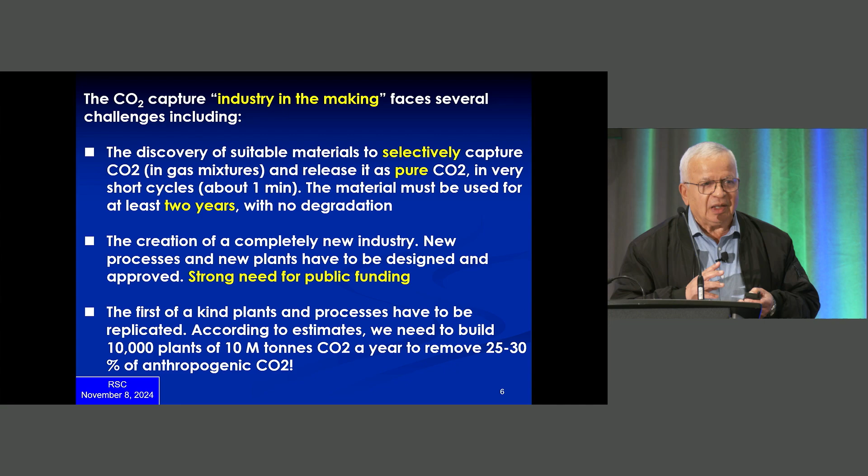Okay, so the first problem we said is the CO2 emissions, how large is it? Then the industry does not exist, okay? It is now being built, that industry. We don't have industry for CO2 capture. We have industry for CO2 removal, and that's a different thing, and I will explain.

Okay, this is the CO2 removal. This industry exists 70 or 80 years now, and it removes CO2 from high-value gases, like natural gas or hydrogen. And therefore, we afford to have a cost on this technology. But if you are removing CO2, or if you are capturing CO2 for the sake of capturing CO2, it has basically no value. Okay, so we are removing CO2 to make clean nitrogen, and we just let it go in the atmosphere. So that's why it is very costly to just capture CO2.

But if you are removing CO2 from natural gas, it's fine. It can have a cost, and we add it to the cost of natural gas. Or if you are doing it to purify hydrogen, that's fine. If it has a cost, we put it on the cost of hydrogen. But if you are removing CO2 from flue gas that we usually just let go, then we have to try to decrease the cost as much as possible.

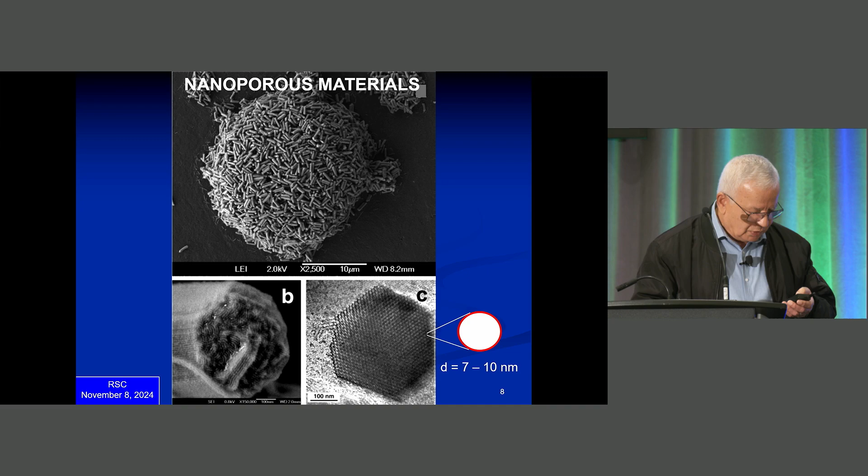And even that cost, it has to be paid by society, because there is no value to the CO2 we make. Well, there is some CO2 that has value, but most of the CO2 that we are trying to capture, we try to sequester. Okay, that is the issue. Now, what is the problem with this technology? It has been used for CO2 removal, and we can use it for CO2 capture.

So what do we do? We remove CO2 from a mixture of gas, then we sequester it in this compound. Then after that, we take this compound and we release pure CO2. Then we can do whatever we want with that pure CO2. It's no longer mixed with natural gas. And up to a few years ago, we just let it go, because the objective was to remove it from natural gas, not to capture it. But now we want to capture it and we want to sequester it.

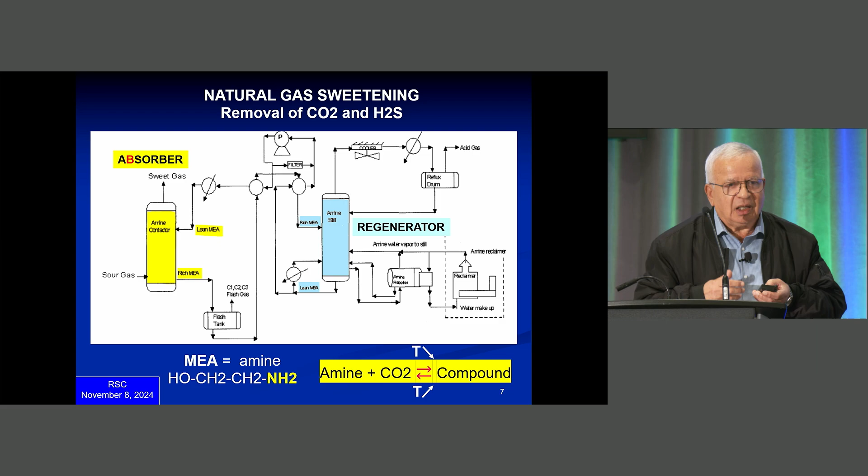And that's where my expertise comes to play, because I have a lot of knowledge in nanoporous materials. These nanoporous materials are materials that have very, very tiny channels. As you can see, their diameter is about 10 nanometers. And for those who want me to remind them, you take 1 millimeter, everybody is familiar with 1 millimeter, and you cut it in 1 million pieces, and that's a nanometer.

So these pores are very tiny, and they create a huge surface. And I need that surface to anchor my amine. So now I move from a liquid that has amine dissolved into it to a solid that is holding the amine groups. And I don't need to deal with any water at all. So I move from absorption, that is the removal of CO2 from a solution, to adsorption, that is the removal of CO2 using a solid material. So I'll be talking about adsorption using this kind of material.

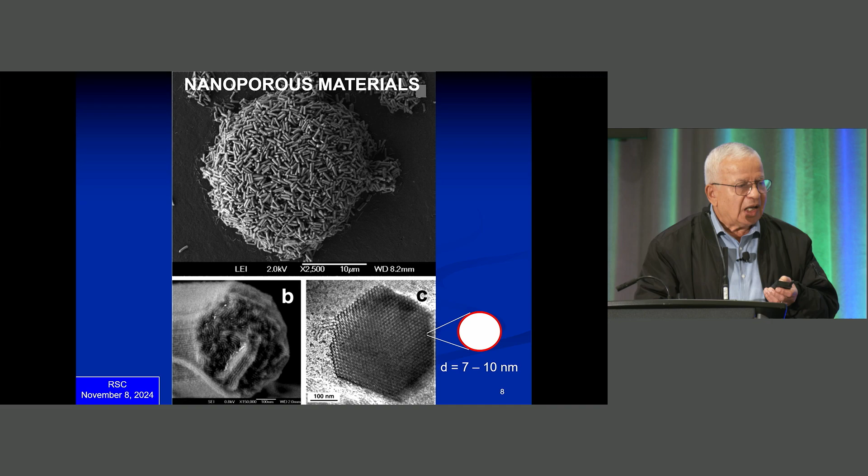So how we connect amines to this kind of material. There are 2 types of amines. The first group, you can see, I don't think I have a pointer here, do I? But anyway, at the end of these molecules, you see this silicon something. So these molecules have their left part that can be anchored to a surface.

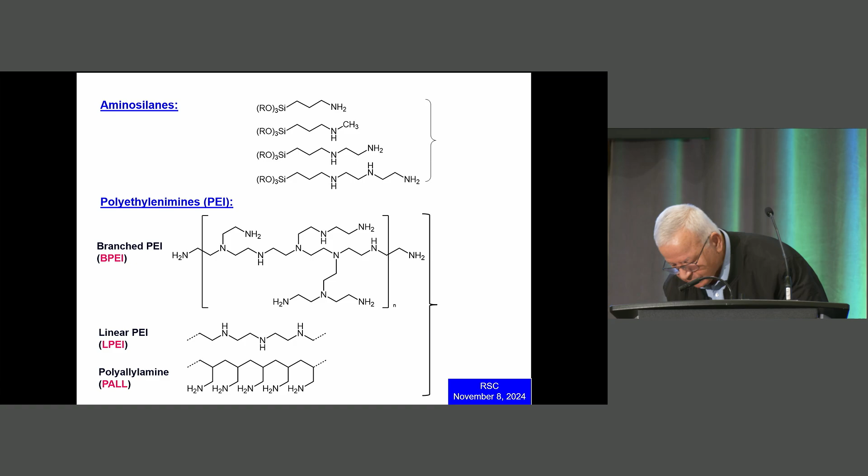The other are polymers. You can see, yeah? I think this, no, that's to go back. No, sorry. That's fine, I can keep.

So the other group that I call polyethyleneimine, PEI, these are polymers that are rich in amine groups. You see, every time you see nitrogen, it's an amine group.

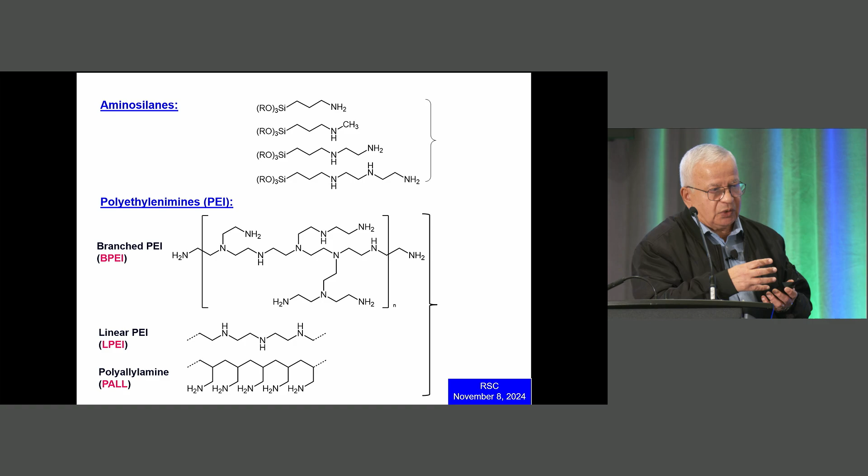And the way to associate these types of molecules with the solid that I showed you, there are two ways. The first group, they are directly connected to the surface of silica. You see, the surface is rich with these OH groups, and they are directly connected. So we call this the surface grafting method.

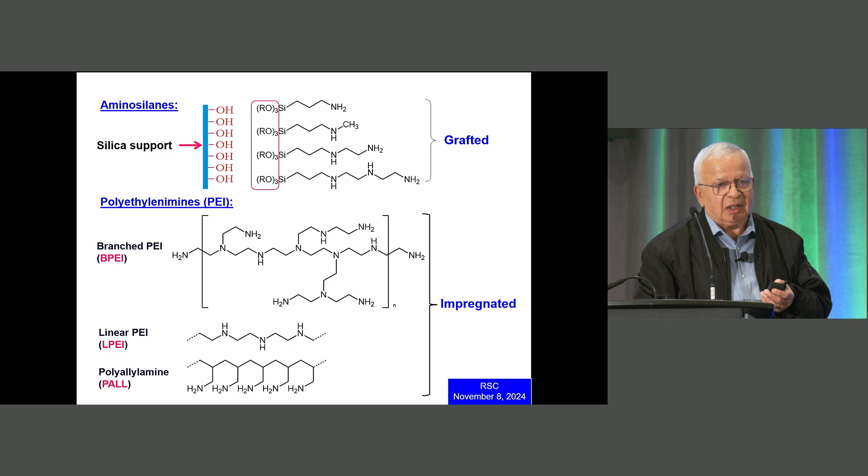The other group, we just deposit them in these channels. Because these are polymers, we drive them inside those channels using a solvent. Then after that, we dry the solvent, and they stay there. So now, this is our material to capture CO2. We have a solid material that has amine groups, but the chemistry is very similar from solid to liquid, or from liquid to solid.

And for the first 10 years, this is what we did. We discovered some material. For anybody it's just a white powder, but it has the capacity to capture CO2 from mixtures and release pure CO2. Because people say, why are you capturing and releasing? We are capturing from a mixture, but we are releasing pure CO2.

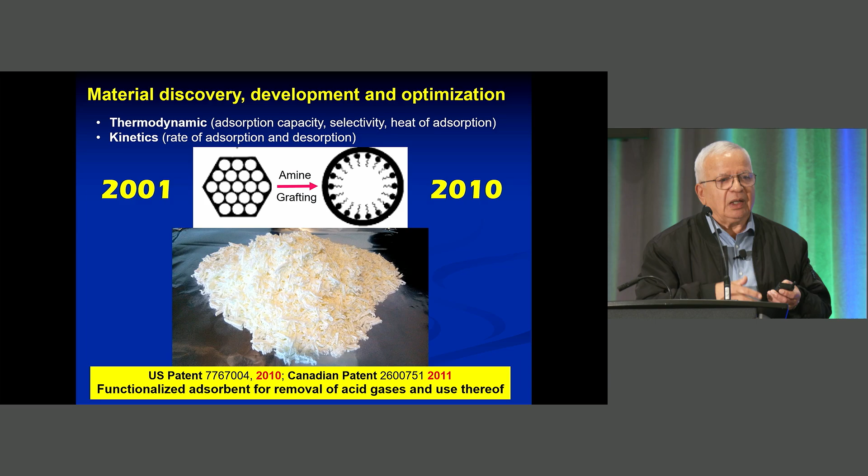And then pure CO2, you can pipe it to somewhere and do many different things with it. I can show you later on what we can do with it, but we have too much of it. So most of it has to be sequestered, even though some of it can be used to make chemicals or to do enhanced oil recovery or things like that.

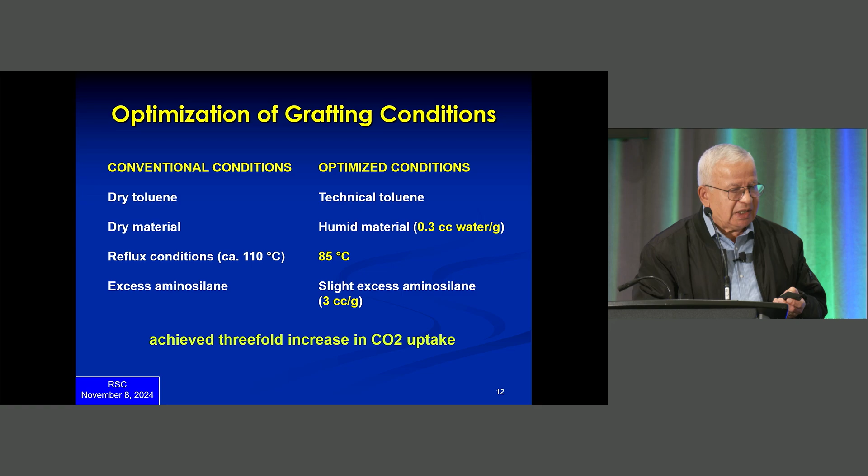Okay, so the first thing we did a long time ago, we optimized the grafting conditions. I'm not going to go through the technical detail, but by doing that, we were able to increase the CO2 uptake by a factor of 3. The next thing is, when you remove CO2, you are using some available gas mixture that has CO2 and you want to remove it.

All of these gases, they contain water. So even if you remove CO2 from air, it has water. From flue gas, it has water. From biogas, it has water. So we need to look at what is the effect of water. That is the first thing we need to do, because water is there everywhere. All these gases have some relative humidity, so we needed to look. And that's why our first paper was about water tolerance. That is our first paper 20 years ago.

Because there are some other very, very good adsorbents, but they are very sensitive to water. So in order to use them, we need to dry the gas, but that is out of any possibility. It's too expensive to dry air to remove CO2. Okay, so we need to use the gases as is. If they have water, so be it. Then you need to develop materials that are tolerant to water.

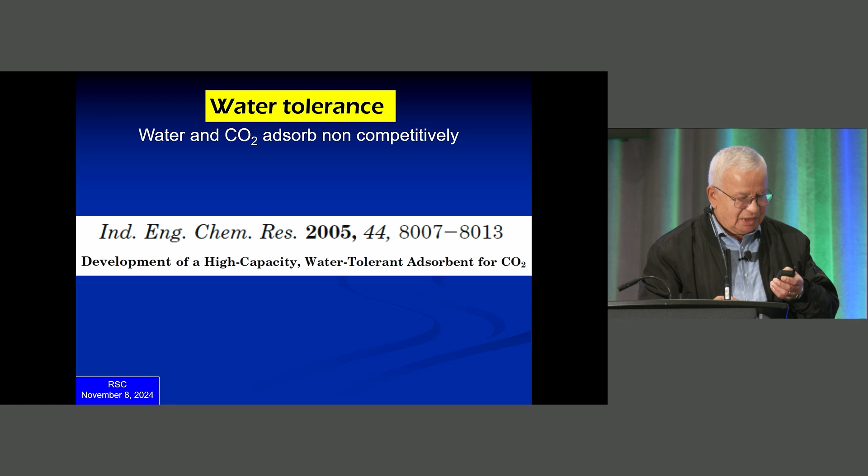Then we discovered that these materials are not only tolerant to water, they benefit from the presence of water in two ways. The first one, we found that water is actually a promoter of CO2 adsorption. You can see the line that goes up, that is our material. When you increase the relative humidity, your CO2 uptake increases. At least in this particular case, it increases by 25%.

While when you take some other famous adsorbent like zeolite 13X, you can see it goes south as soon as you have water in your gas. The chemistry for the promotion is shown there, but I promised not to talk a lot about chemistry. But there is a chemical explanation why water promotes CO2 adsorption, because it changes the chemistry to something more favorable.

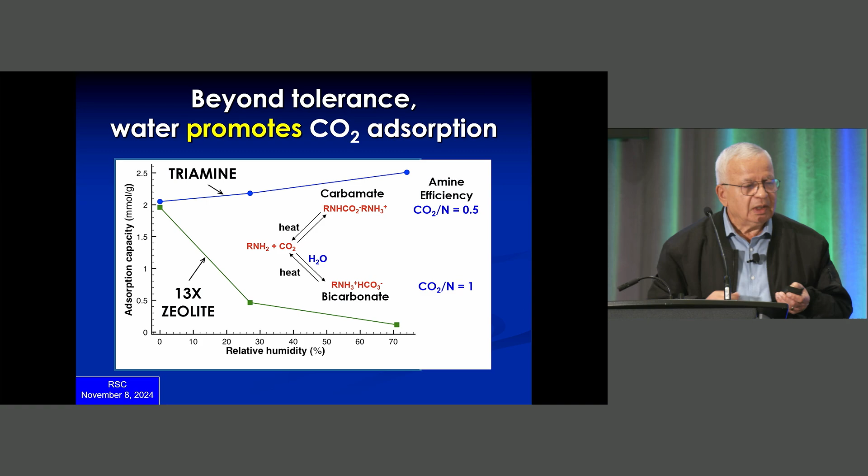The other thing that we discovered later by sheer luck is that we wanted to look at how stable our material is. In order to see how stable our material is, you need to cycle it, okay, to adsorb, desorb, and see what happens. And that's what we did, okay? So here, these are 5 experiments with 5 different materials under 5 different conditions. But don't look at the detail.

What you need to look at is how they are all decreasing. So my material is losing steam, is deactivating. Even under very mild conditions, it is deactivating. And here I am using just a mixture of CO2 and nitrogen from a gas cylinder. So it's not even a real mixture, it's a very simple mixture.

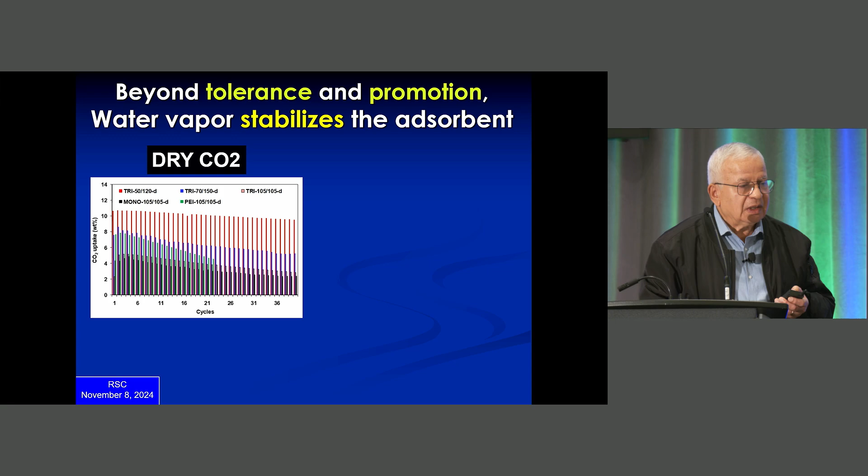And by luck, we humidified, we added water in the gas phase. And this is what happened. So everything got stable. So water has a stabilizing effect on amine groups, and that also has a chemistry origin. Under dry conditions, the CO2 itself is poisoning the amine by making some stable groups and removing the amines slowly in the form of groups that we call urea.

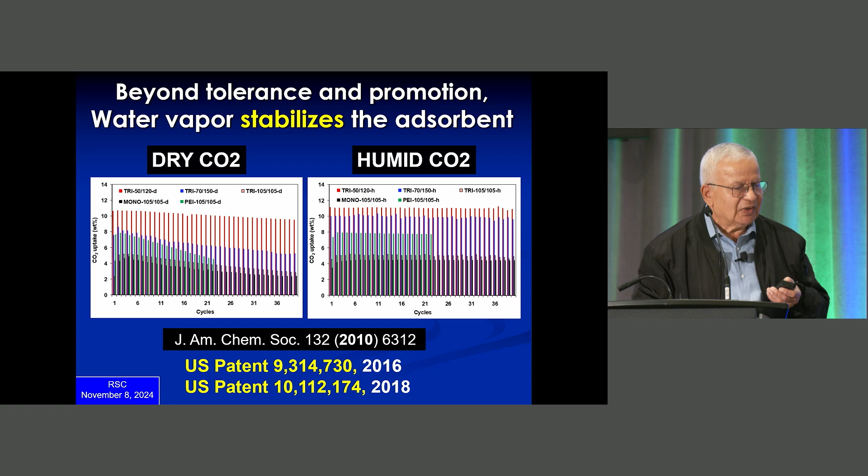Instead of this reversible chemistry, now we have an irreversible chemistry. And the origin of that irreversible chemistry is the absence of water. In water, it does not happen. That's why the materials get stabilized. And we patented that discovery, and we published it in a nice journal.

And the next one, this is chemistry, unfortunately, but it shows you the red arrow leads to the irreversible chemistry. And you see that irreversible chemistry releases water. Then if you put water, it will prevent it. So if you have water in the gas stream, you have the lower chemistry, what is written in the bottom of the page, and there everything is reversible. So everything is stable. So that is a very, very important role of water.

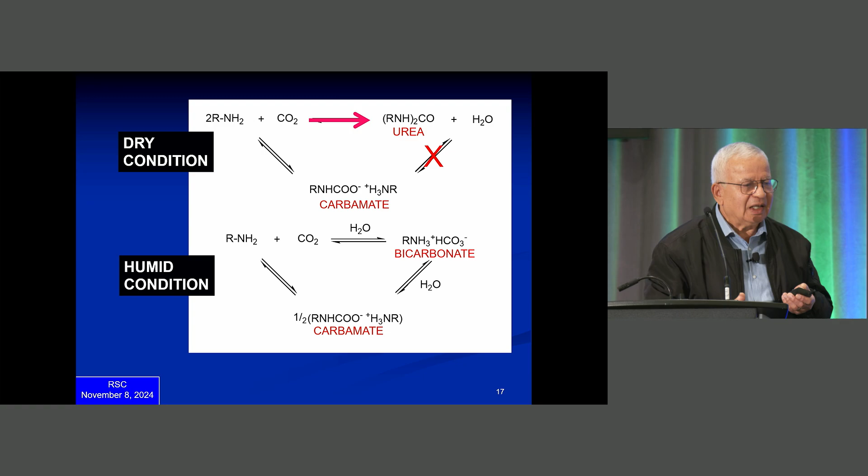Now, basically, even if you have dry gas, you need to humidify it. So water is no longer an enemy. It's on the contrary. We need water in the gas phase, first to promote the adsorption, and second, to stabilize the amine. Okay, I'll move on. This is too much chemistry, so I'm moving on.

Okay, so this basically summarizes all the things that we've done the first 10 years, and it was mostly focused on the development of materials. Then we said this material is not in the lab, where it has to stay for a couple of days or 3 days. In industry, some industries want this material to stay there for 2 years. For 2 years, you are cycling, and every cycle takes 1 minute. They want 1 million cycles to get their money back. So we need very, very, very stable materials.

But this process, especially the industrial process, is brutal. I will show you later what the material has to go through every single minute. So the material has to have all kinds of resistance, from chemical to against oxidation to mechanical to thermal, to a lot of stability issues, so that the material has to be there and has to perform at least up to 80% of its maximum within a period of 2 years.

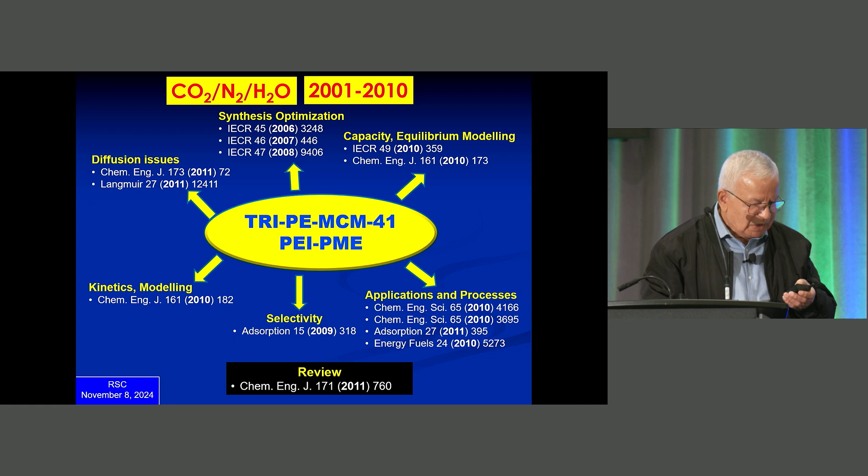So we try to look at the effect of other impurities that we usually find in flue gas. Most of the work is done with flue gas in mind. Flue gas is the combustion gas in power plants. You are combusting some fuel, and that fuel has nitrogen and sulfur and particles, so there are many, many different impurities. You could have H2S, like in biogas. You could have SO2, like in flue gas. You could have also nitrogen oxide. And we need to look at the effect of each one of these impurities.

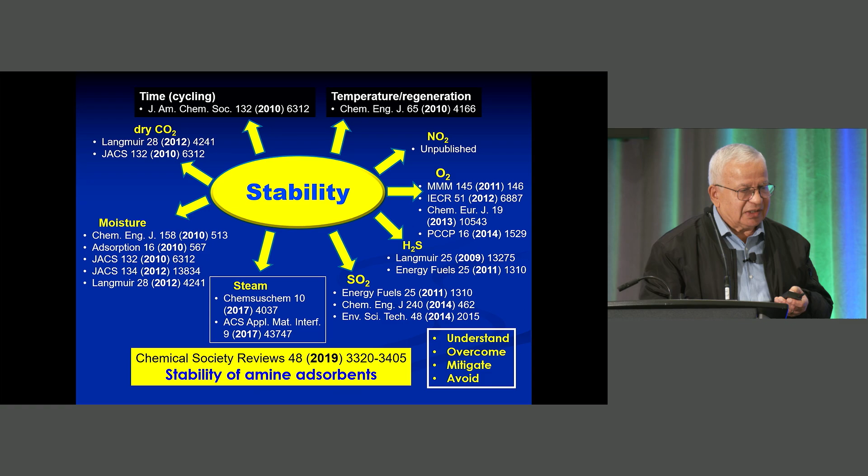So I'm going to talk a little bit about SO2, because I think a lot of you are familiar with acid rain. That is SO2. A long time ago, this flue gas was released as soon as you made your combustion. You just release it, and it has a lot of SO2, which combines with water in the atmosphere and makes sulfuric acid, and it drops as rain on forests and things like that. Since then, there has been legislation to remove SO2 from flue gas, but there are limits of SO2 concentration that you can release.

But even at the ppm level, that's parts per million, SO2 can be very harmful to amine groups, because first it is an acid gas, the same as CO2, so it absorbs as CO2, but it absorbs more strongly. Then it will poison your amine.

So even if you have very, very low level of SO2, you need to get rid of it before you remove CO2 or before you capture CO2. So basically, we need to create a new material that we use as filter, that we use first to remove the SO2, then the rest of the gas will go to the material that is meant to capture CO2.

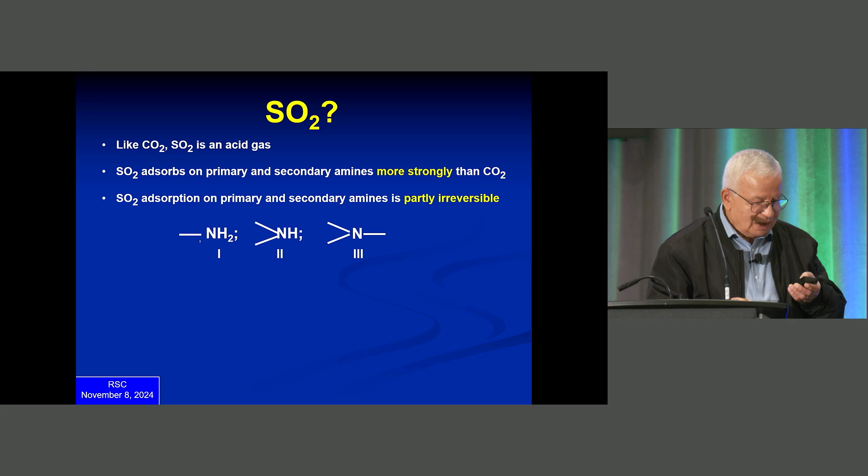So you see the one on the left has 2 hydrogens, that's a primary amine, then the secondary amine. Those two, they absorb CO2. But the other one, the tertiary amine, it does not absorb CO2, but it absorbs SO2. So we said, okay, we're going to make a material that has only tertiary amine. And that's by just changing existing material.

So for example, here you have different examples of material that has originally primary amine. Like, for example, this dendrimer that you see on the left-hand side, inside it has tertiary amine. You can see every amine does not have any hydrogen, but it has a corona with NH2s. These are primary amines. And people who know organic chemistry, they can remove all these hydrogens and replace them by methyl groups. And now what you have on the right-hand side is a material with only tertiary amines.

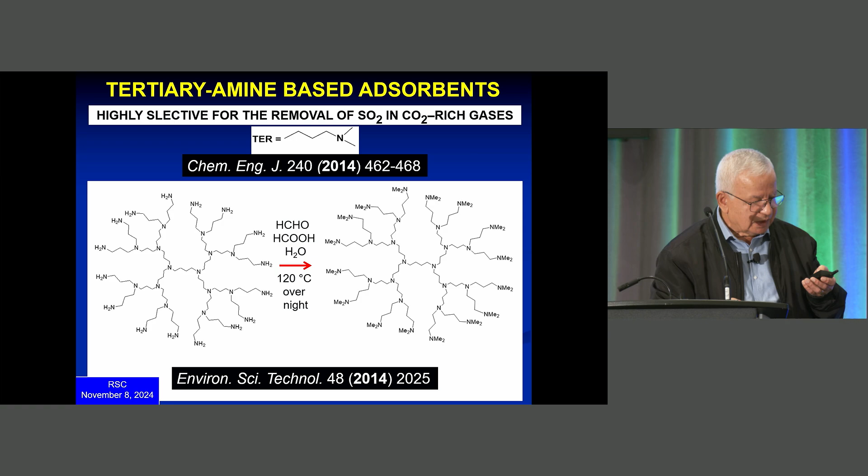Okay, this is another example. This is yet another example that we did very, very recently. But all these are based on the same idea, how to make a material that has only tertiary amines. Because those tertiary amines, they selectively absorb SO2, but they don't absorb CO2.

So when you have your mixture that has, let's say, 15% CO2 and 10 ppm of SO2, you have to run it through this filter, and it will remove that tiny bit of SO2, and the rest of it will be SO2 free, and will go to the material that I talked about a while ago that captures CO2. Okay, but when we capture CO2, we need to use gases that are free of SO2, completely free, okay? Even if you have few ppm, after a while, they would have an effect.

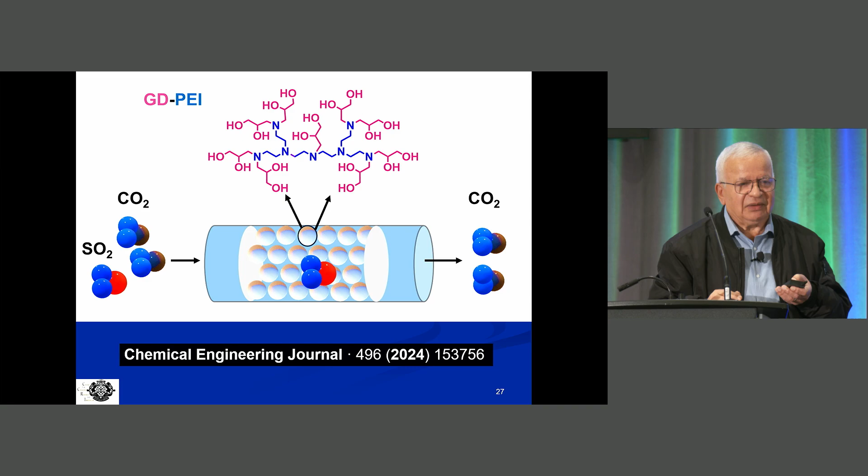So you can see here that we get the same, this 2.49 or 2.52, this is the SO2 capture, either as 5 ppm SO2 in nitrogen. There is no CO2 there. But after that, we add 50% CO2. So when you compare 5 ppm and 50%, there is the ratio of 10,000. There is 10,000 more CO2 than SO2, but yet we capture the same amount of SO2.

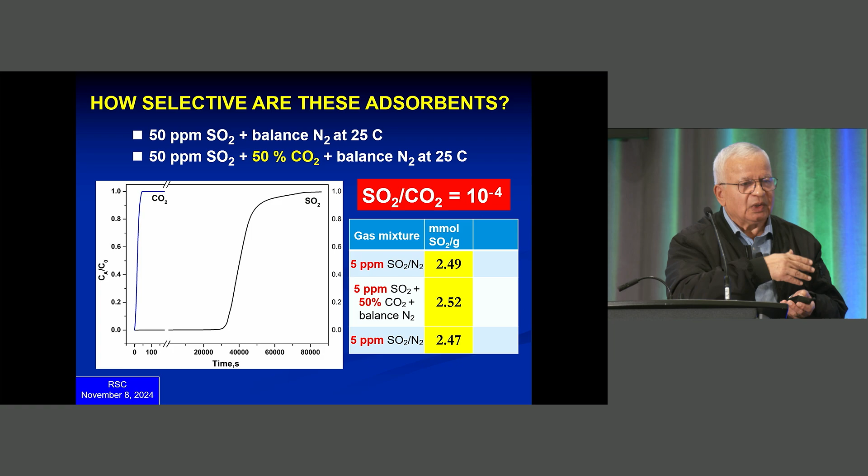So this material is extremely selective, and it will free your gas from SO2 completely. Then you can move to the next step. And you can use it as a filter in the same tower, so it will not be a separate process.

This work is on the oxidative degradation, okay? We are all very sensitive to oxidation because that's how we get older, because of oxidation. So oxidation is the effect of oxygen. And as you will see later on in the process, there is one step where the material is in contact with air at high temperature. And that's where oxidation may occur. So we started working on oxidation.

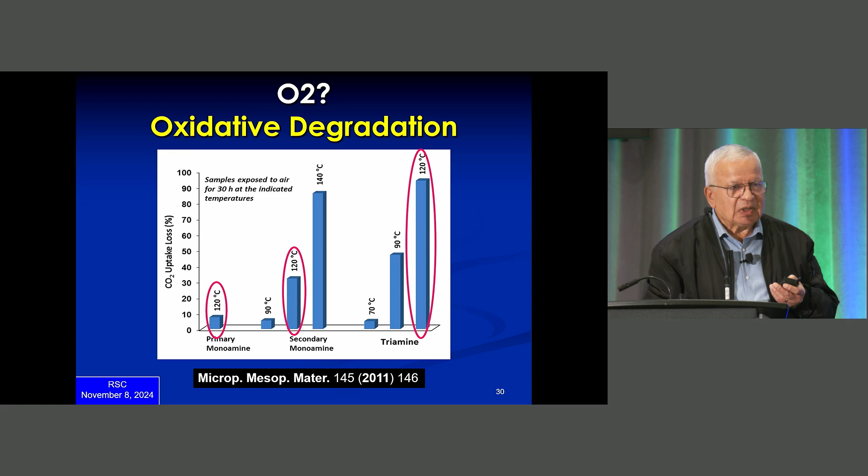So this is different types of oxidation, different data on oxidation, and there are different temperatures for different materials. And this is now probably the #1 issue that many academic labs and industries are working on, because it's very difficult to overcome, okay?

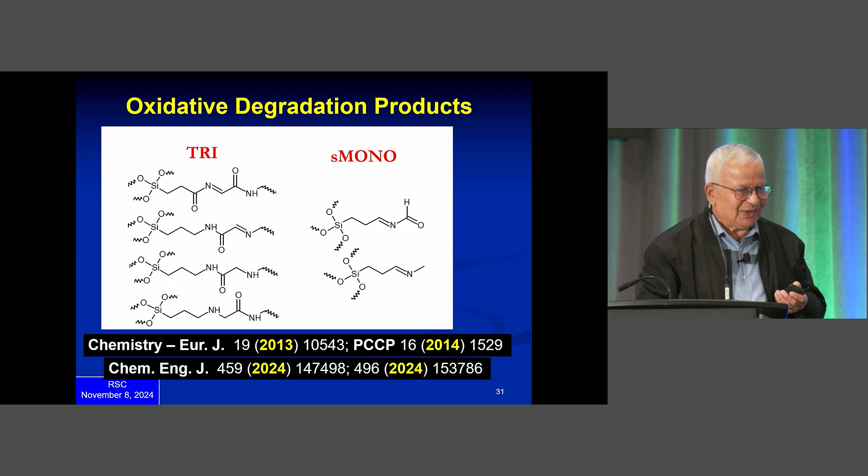And now I move from my lab to outside my lab to tell you a few things that I know, but I am not part of. Well, I'm part of it in discussion and in collaboration, but I am not in the bulk of it. Okay, so these are 3 among the most successful carbon capture companies, and they are all still in their infancy, because they all started less than 15 years ago. Before, there was no industry for CO2 capture.

So for example, Svante, which is in our neighborhood here, started in 2007. Global Thermostat started in Georgia, 2009, and Climeworks started in Zurich.

And all of these companies, they have roots in universities. They actually use materials that were developed in universities by people like me who do not know anything about industry. Okay, so for example, Global Thermostat, they are using materials that have been developed at Georgia Tech. Climeworks was started by two students from Zurich, but now each one of these companies is worth more than $1

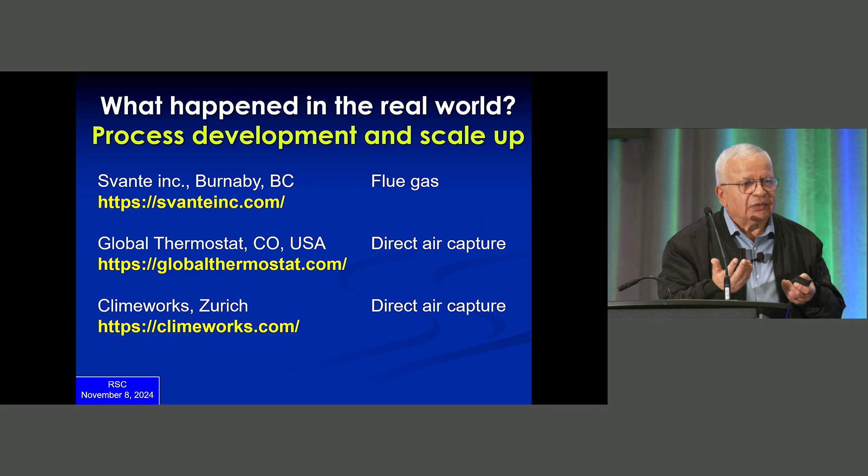billion. Okay, and there is a lot of public funding in this area right now, because the only way we can develop this industry is by public funding. The real industry still does not see the value or the opportunity for investment, for return on their investment.

Okay, so this is the typical industrial process. It's in 3 steps. Step 1, you adsorb the CO2 at a relatively low temperature, usually from room temperature to 60 degrees. Then you regenerate the material at higher temperature, usually around 100, 110 degrees. Then you have to cool the material to bring it back to the original state, to reuse it. And this cycle has to be very fast, because we need to remove lots of CO2. So the material has to respond very quickly to all these events.

Now, for regeneration at high temperature, you can just heat, but in the industry, many industries opt to use steam, because steam is often available in power plants. And the other advantage of steam is that it's the source of heating already, but when it takes CO2 with it, later on you just have to cool down and the steam will condense and you get pure CO2. So it's a very, very good solution to get pure CO2, to remove it with steam, then after that you cool it and you get pure CO2.

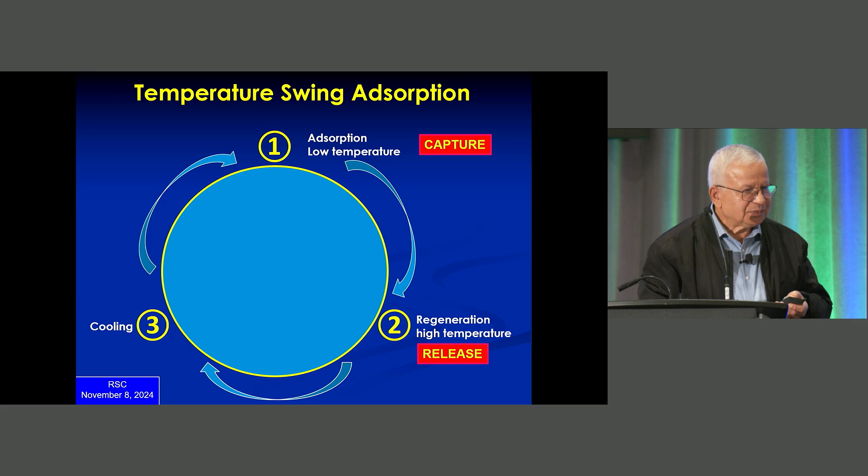Okay, so how does it work in the real world? You can have your adsorbent in what is called a fixed bed, like in a tower, like the ones that you see in an oil refinery. We put 200 kilos of material there. Then we bring those gases one by one. We bring the CO2-rich gas to adsorb. Then after that, we change it to steam. Then after that, we change it to air.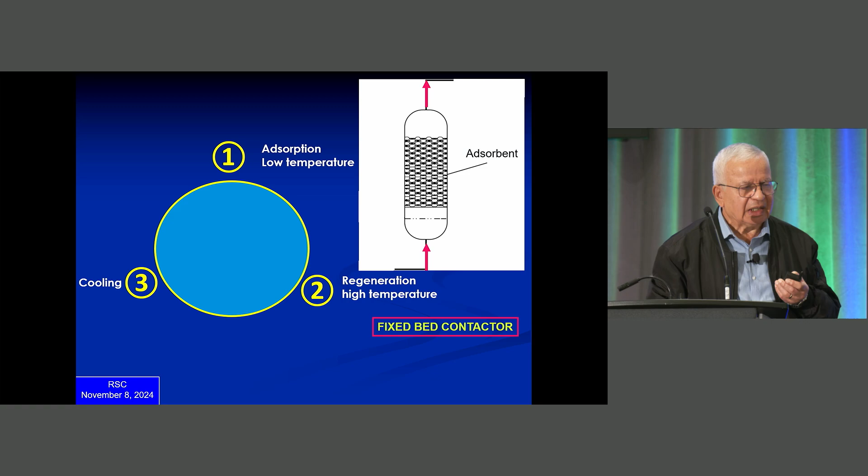So in this process, the material is fixed. That's why it's called fixed bed. And we change the flux of different gases to cover the 3 steps, okay? This is problematic because this thick layer of material creates a lot of what we call back pressure. So you need a lot of pumping and things like that. So it's better to change this system into what Svante is using.

So Svante is using a rotor. You see this big wheel, and now they have larger and larger wheels. I think their largest wheel now is a 24-meter wheel, like this room or something like that. And you see the size compared to that big 18-wheeler. And that wheel is charged with the filters. You can see some schematic of the filter, and what is inside the filter are thousands and thousands of carbon sheets. And each carbon sheet has a layer of adsorbent.

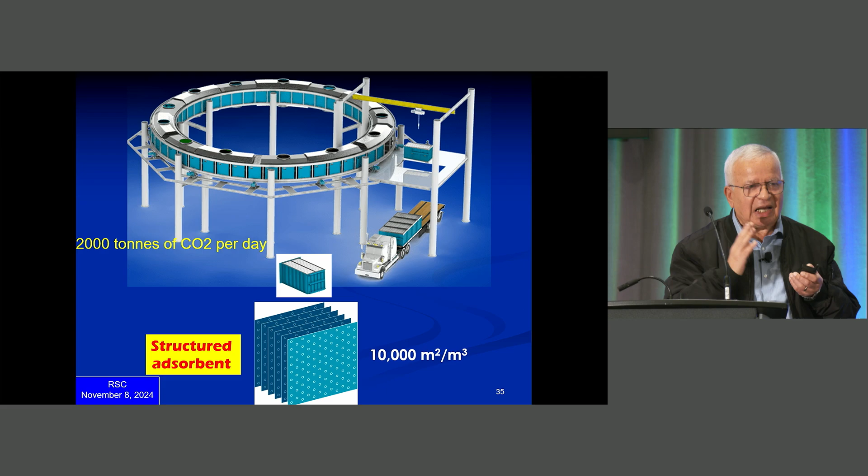And between those two carbon sheets, you have 1 millimeter. And the gas will go through it, and you'll find the adsorbent on the left and on the right. Okay, so the gas can flow without resistance. That's the importance of what we call structured bed. It allows the gas first to be in contact with the adsorbent, but without strong resistance, like in fixed bed.

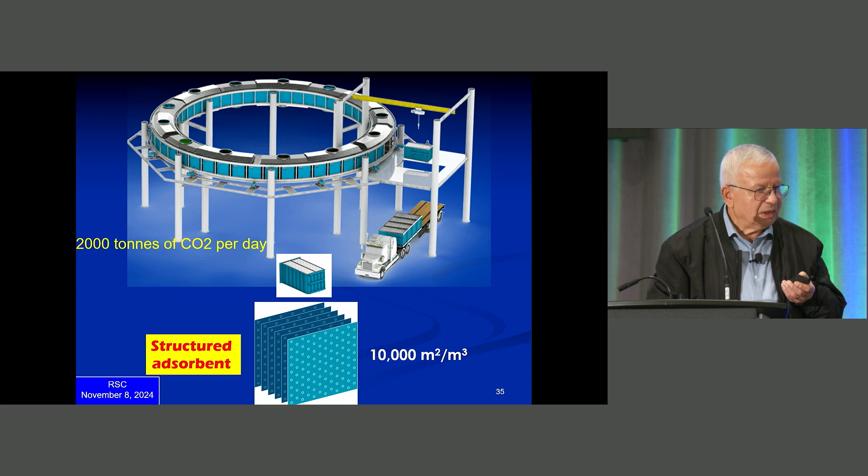And you can use these carbon sheets. These carbon sheets are not done by hand. They are done by robots and stuff like that. So when you go to see their installation, it is like Star Wars or something, okay? So this is basically how it works.

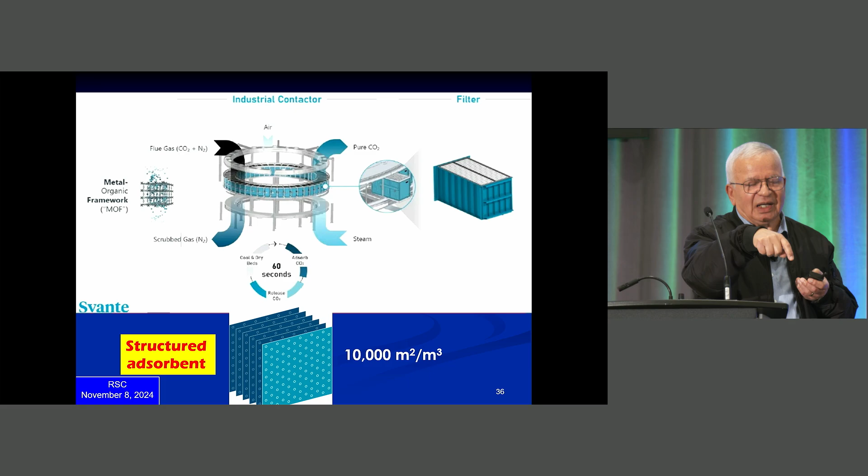So you have this rotor in the middle, and you have those three gases in fixed places, and they are running all the time. And it's the material that rotates. So first, it rotates, and it finds the gas that contains CO2. It adsorbs CO2. Then it moves, and it finds steam. Then it releases CO2, and it moves, and it finds air. Then it cools down, and so on.

And this is now the cycle. So the cycle is the rotation. But now it is the material that rotates, and those three different gases are always running. And this is a much, much better system. Okay, you can see the cycle in the bottom, and it says 60 seconds.

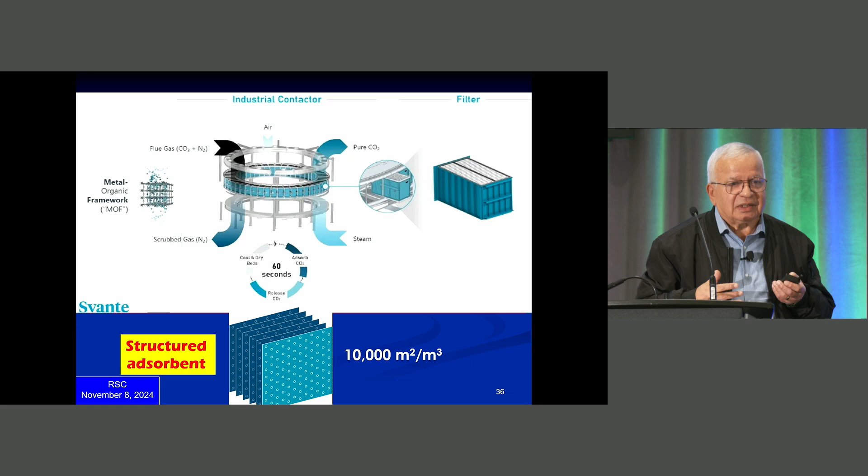Well, obviously, mechanically, we can rotate this thing even faster. But the problem is the material has to respond, because we can run faster, but the material does not have the time to do its job. Okay, so the rotation is not limited by the mechanics. It's limited by the response of the material.

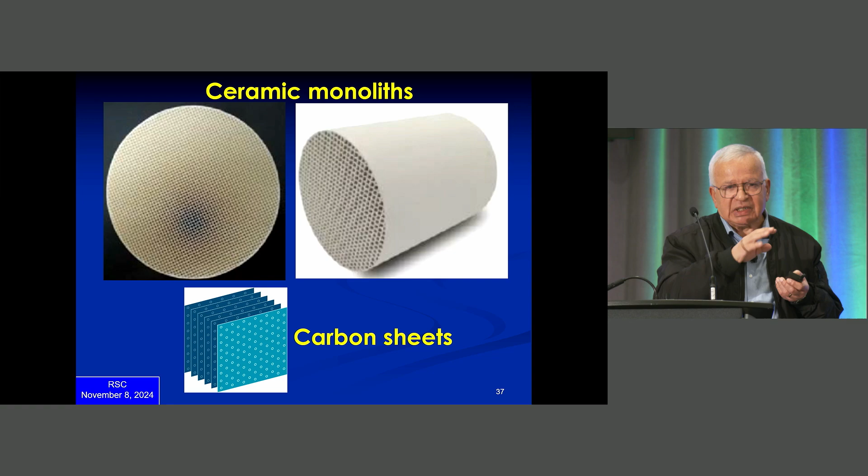Some other people use these ceramic monoliths, but it's the same principle, because these monoliths have these holes, and you build layers of adsorbent inside them, but they remain open. So the gas can flow through, and the gas will be surrounded by the adsorbent in every tunnel. Okay, and these are available commercially.

So this is how it looks like. It's a real industry. See, this is how it looks like. And these are the filters, and they are done on a very, very large scale. And all this is still demonstration scale. This is not real carbon capture. This is just to convince the world that there is something here, okay?

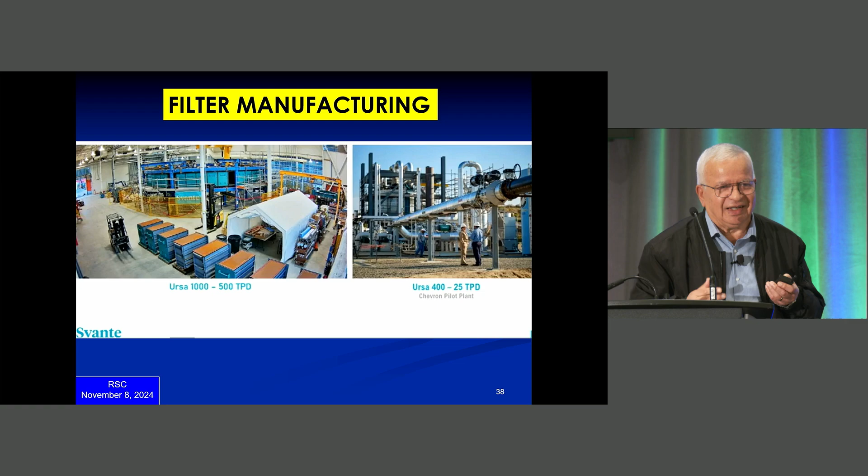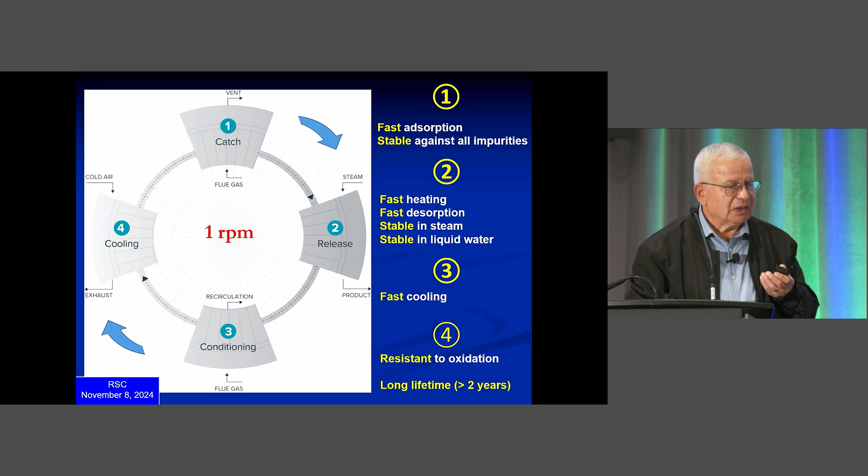So for the time being, we are adding one more step called conditioning, where we cool a little bit in the presence of nitrogen. So instead of cooling directly from 110 in air, we cool it, for example, to 70 degrees in nitrogen. Then we switch to air. And this operation costs money, because nitrogen is not as cheap as air.

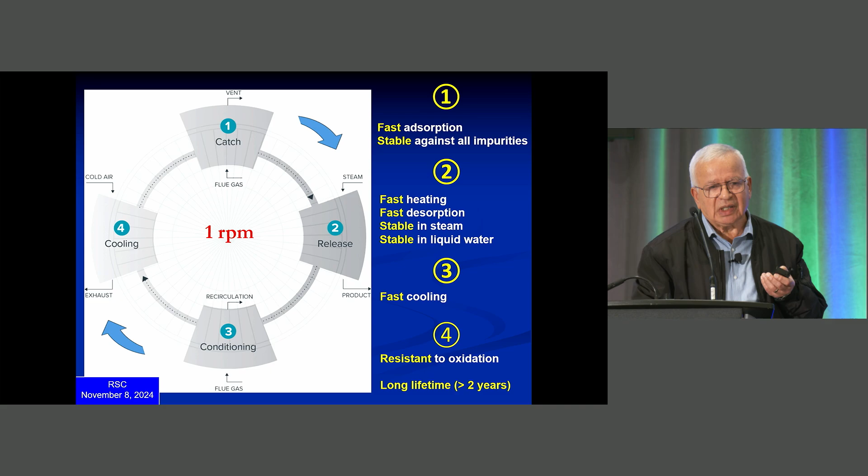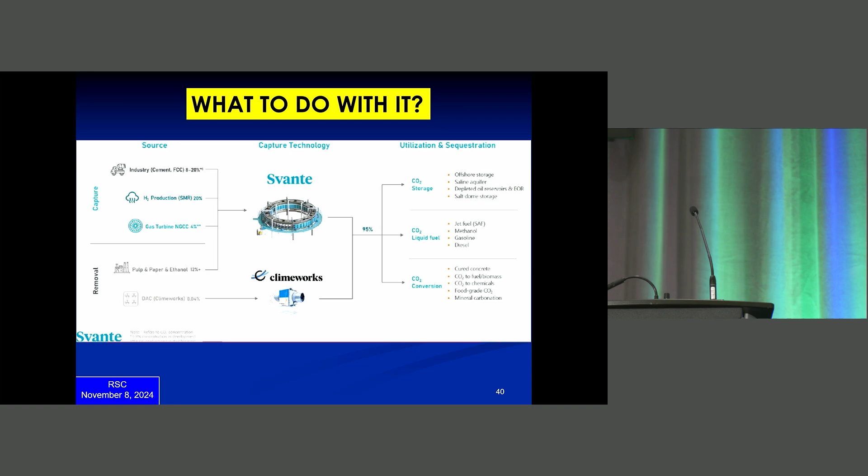Okay, so these are some of the markets for CO2. So you can see you can have CO2 storage, that is sequestration. Probably that is the largest opportunity for CO2, to get rid of CO2, is to sequester it. But then after that, you have a number of actual applications.

So a lot of people tell you, oh, they can make jet fuel out of thin air. Okay, it's nice in a magazine. But in real life, it's so complicated. But there are people who are trying to make jet fuel out of thin air. You can make methanol with CO2. These are the regular chemistries of CO2. So once you have CO2, you can use it to make those. But instead of making CO2, you use the captured CO2.

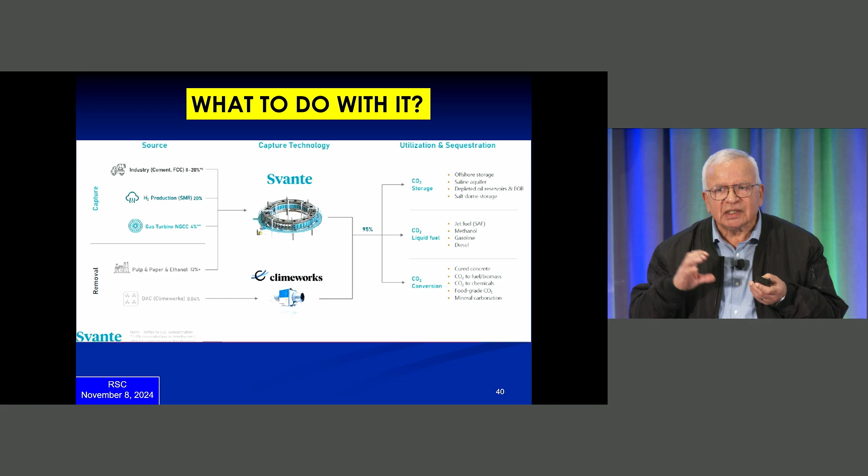And there is CO2 conversion. You can convert CO2 into some other chemicals or polymers, but all these are small-scale applications. They have no relationship with the huge amount of CO2 that we have. Okay, but they are helpful.

Okay, this is, I stole this from Svante's presentation, and you can see the blue circle, that is what I talked about today in terms of industry. That is Svante's job. My job is even on the left, okay? And you can see all the industries that you need to find all the way to sequestration. You need to have companies that replicate, for example, the Svante system once they have it approved. And you have to have people who operate it. Then you have to have people who commercialize the CO2, or piping and pressure, and all kinds of things until you bring it to some place where you can sequester it. There are some places in Alberta, I've been told. Okay.